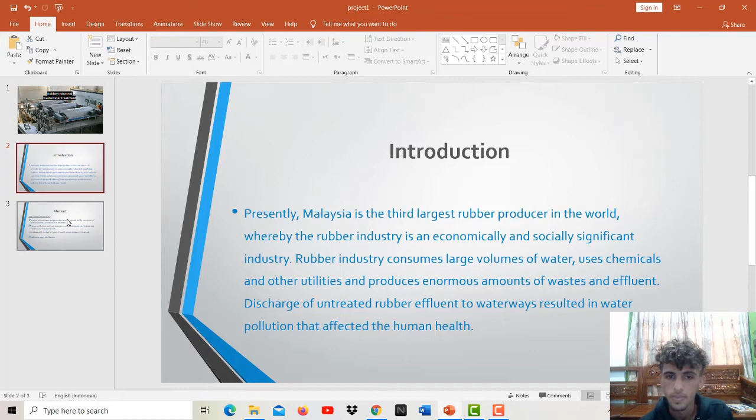Abstract. This paper summarizes various technologies and methods currently applied for the treatment of latex processing wastewater in Malaysia. The new effective methods being researched and applied in Thailand and Vietnam, countries with the highest production of natural rubber in the world, are also mentioned. Different types of effluents.

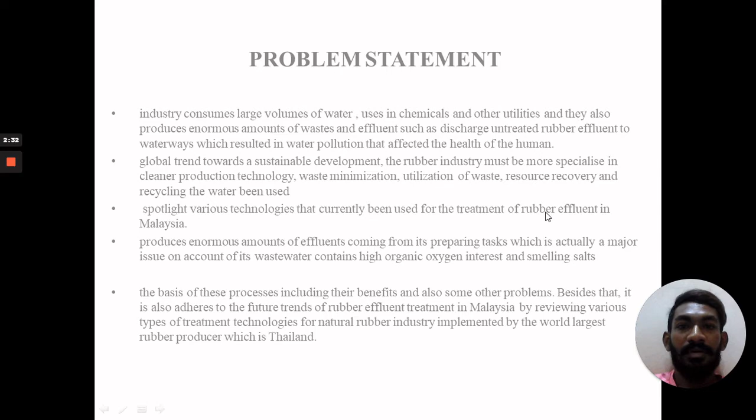Now I'm going to explain the literature review. Wastewater collected from the rubber processing factory contains some substances as well as commercially important constituents from the rubber hydrocarbon. It contains protein, minerals, non-rubber hydrocarbons, and carbohydrates. This wastewater has high concentrations of ammonia, BOD5, COD, nitrate, phosphorus, and total solids.

Moreover, the wastewater from the latex concentrate and skim crepe industry contains sulfide, which comes from the sulfuric acid in the skimming process, and some processes produce rather high contents of zinc and cadmium. Wastewater treatment practices are often mentioned as pollution abatement. Pollution abatement involves in-plant control inside the factory and end-of-process treatment of wastewater. Some in-plant control measures are introduced to reduce water consumption and pollution generation, and to extend the efficiency of the end-of-process wastewater treatment.

Without proper treatment, the discharge of wastewater from the rubber processing industry to the environment may cause serious and prolonged consequences. Because of this, suitable technology must be used for treating this wastewater in the rubber industry to avoid any effects. The rubber industry in Malaysia has implemented treatment facilities according to the regulations. These systems are inexpensive and have high efficiency of organic load reduction, but are appropriate for areas where land is available.

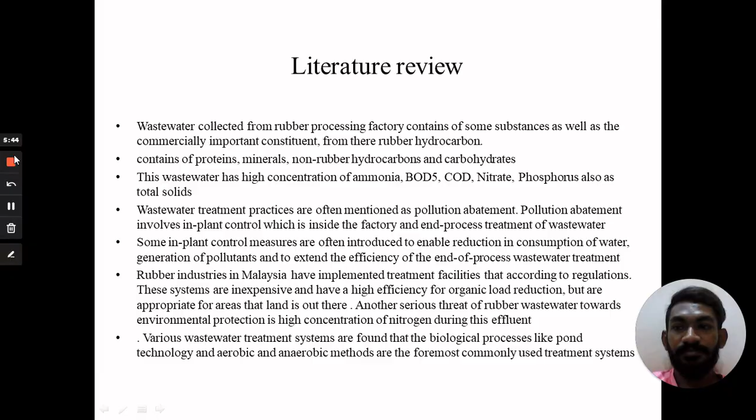I'm going to explain about methodology. It has been discovered that the natural processes, for example pond technology and aerobic and anaerobic techniques, are the most generally utilized treatment processes. The current natural strategy was additionally joined with sulfate reduced system and precipitation to additionally improve the proficiency of rubber wastewater treatment.

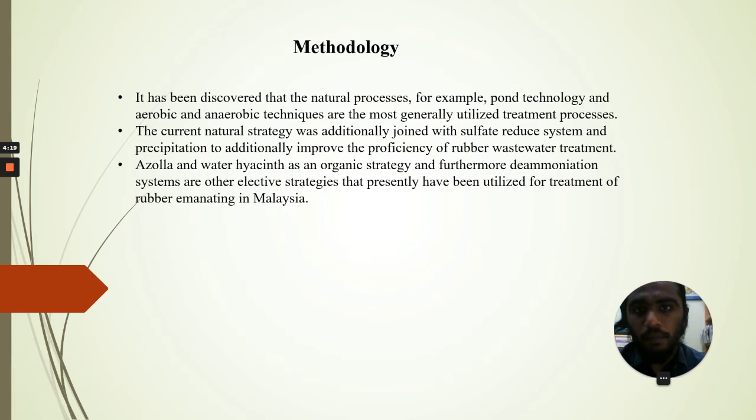Azolla and water hyacinth is an organic strategy, and furthermore deammoniation system are the other alternative strategies that recently have been utilized for the treatment of rubber effluent in Malaysia. Pond technology. Pond technology is a generally utilized technique for the treatment of effluent from the essential rubber industry in Malaysia. There are in excess of 500 palm oil and rubber plants in Malaysia, which practically all have introduced some sort of essential wastewater treatment systems.

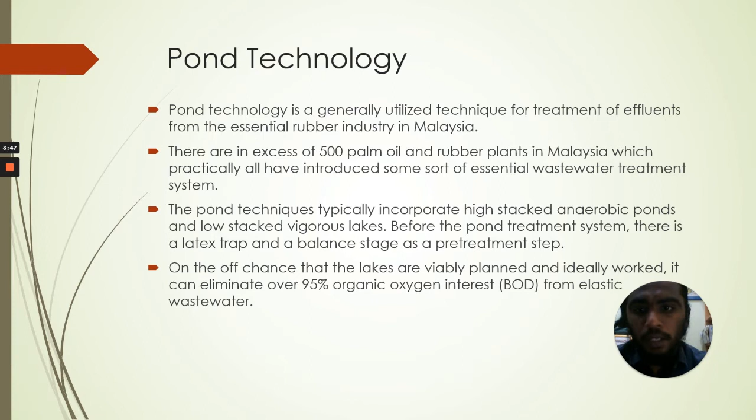The pond techniques typically incorporate high-load anaerobic ponds and low-load aerobic lakes. Before the pond treatment system, there is a latex trap and a balance stage as a pretreatment step. If lakes are effectively planned and ideally work, it can eliminate over 95% of biological oxygen demand from rubber wastewater. Biological treatment is a technique which gives the best decrease of BOD.

Aerobic and anaerobic treatment is the most widely recognized biological technique utilized in Malaysia for treating rubber wastewater, as it is a reasonable treatment with high proficiency. In the rubber industrial facilities where land territory is restricted, aeration systems are utilized as an option of settling ponds. Traditional treatment systems are set up utilizing aeration systems with sludge recycling to build the microbial concentrations in the aeration tanks. It can eliminate over 95% of BOD from the rubber wastewater. This system can overcome malodor and is appropriate for plants with insufficient land area.

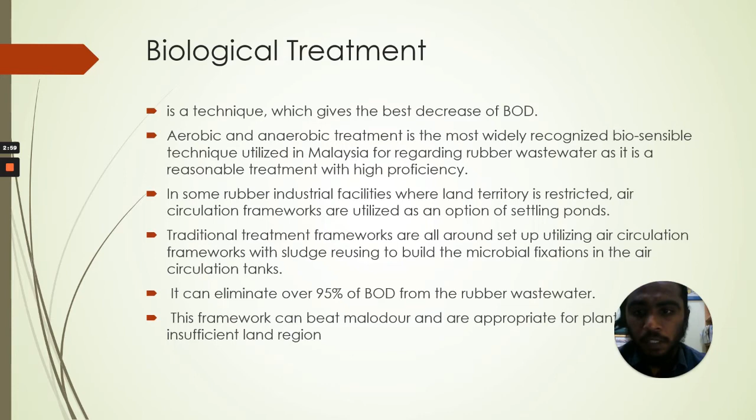Upflow anaerobic sludge blanket reactor, which is called UASB. It works 8 to 24 hours daily and comprises of a wastewater distributor, a cover for dry rubber substance, and furthermore a gas solid separator. It has been discovered that the UASB can carry out agglomeration and granular sludge forming a steady blanket in the reactor. Quick breakdown of natural materials can be accomplished because of the capacity of granular sludge for maintenance of high solids in the reactor.

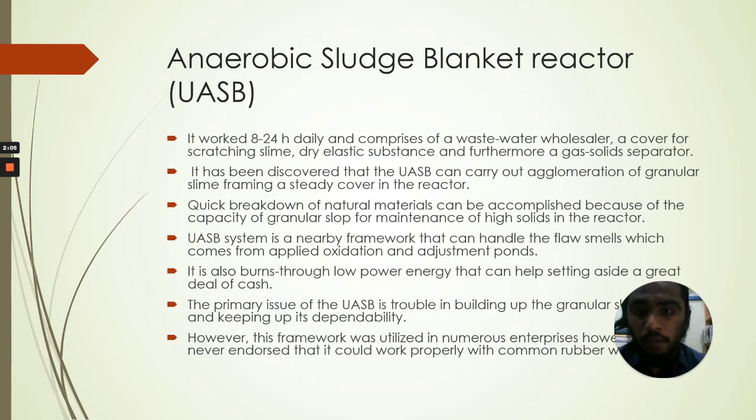UASB is a closed system that can handle the smells which came from applied oxidation and stabilization ponds. It also consumes low power energy that can help save a great deal of money. The primary issue of the UASB is trouble in building up the granules and keeping up its stability. However, this system was utilized in numerous enterprises, but it was never confirmed that it could work properly with rubber wastewaters. This is the different rubber wastewater treatment systems and their efficiency.

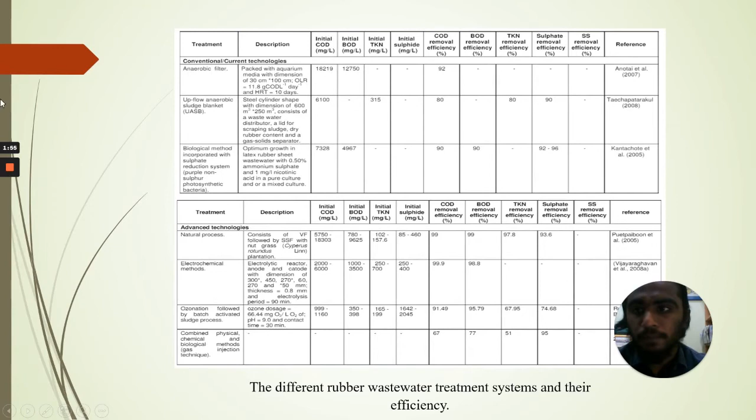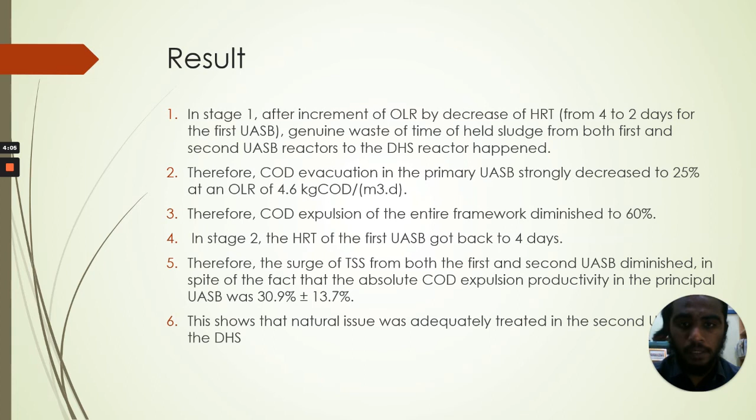In the first UASB, over 90% of sulfate was removed during stage 2, and subsequently the generation of hydrogen sulfide in the second UASB was diminished. In this way, it is recommended that the two-stage UASB system achieves good performance in wastewater treatment by separation of the phases of organic removal by sulfate reducing microorganisms.

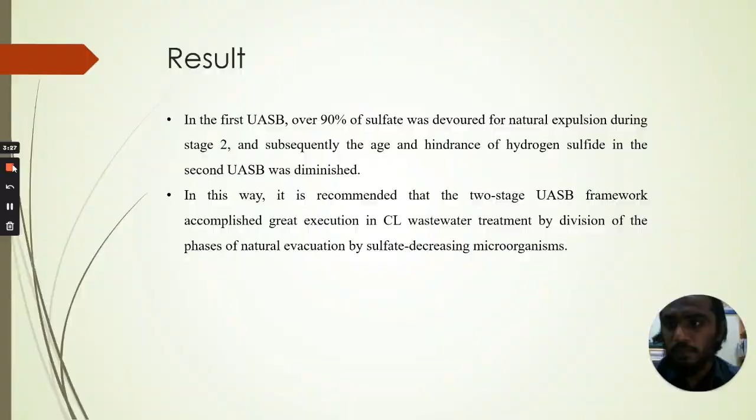I will continue with discussion. From the result, we use aeration treatment, a method called gas adsorption or oxidation, to oxidize iron or manganese. It has been used to transfer a product such as oxygen from air or a gas phase into water. Next, in order to isolate NH3 from wastewater and to remove volatile taste and other such substances in water, air stripping has also been used effectively. Next, it can reduce harmful gas emissions such as greenhouse gases, CH4 and N2O, and ammonia.

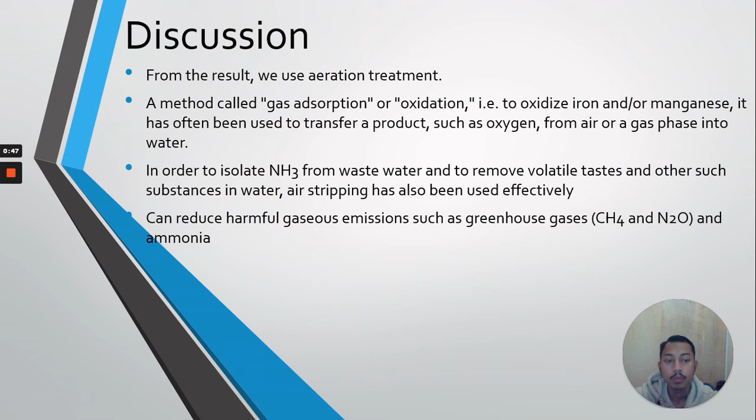We also use an anaerobic treatment. Due to the difficulties and cost of meeting the high demand for oxygen to maintain aerobic conditions, these wastewaters are difficult to handle aerobically. Next, while anaerobic treatment is time-consuming, the treatment of strong organic wastewater has a multitude of advantages. These benefits include higher purification level, the ability to manage high organic loads, the generation of small quantities of relatively very stable sludge, and production of methane, a combustible gas, as the end product.

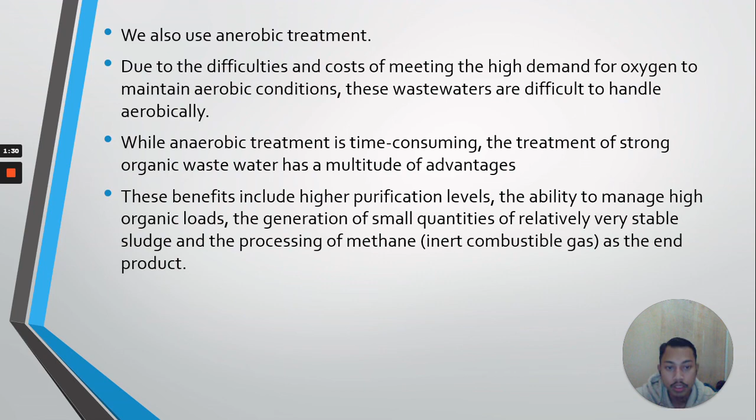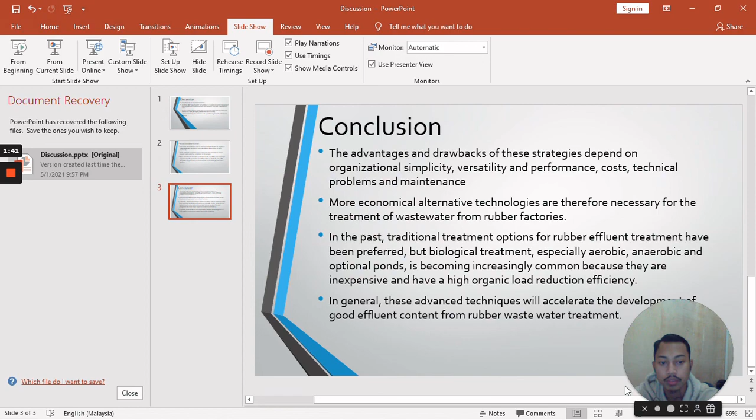Then I will continue with conclusion. First, the advantages and drawbacks of these strategies depend on organizational simplicity, versatility and performance, cost, technical problems and maintenance. More economical alternative technologies are therefore necessary for the treatment of wastewater from rubber factories.

In the past, traditional treatment options for rubber effluent treatment have been preferred, but biological treatment, especially anaerobic and facultative ponds, is becoming increasingly common because they are inexpensive and have a high organic load reduction efficiency. Lastly, in general, this advanced technique will accelerate the development of good effluent quality from wastewater treatment.